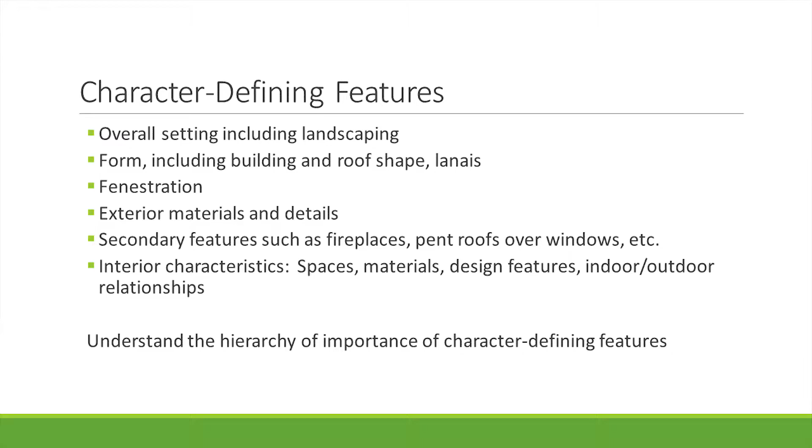Window patterns, door patterns, in other words the fenestration, exterior materials—and vinyl siding is not a character-defining feature, I just want to let you all know that right now. Then there are secondary features like chimneys, fireplaces, window overhangs, and protection that has been added sometimes over the life of the building. And then interior characteristics.

Now, one of the things with any historic home in particular, in understanding character-defining features, is that we advocate understanding the hierarchy of those features. There are some things that are more important, that are more distinctive about any home that you're in, and you should be aware of what those are.

Because the ones that are the highest priority and most important, you should not change. But there are other things that you might be able to fiddle with a little bit that will have less of an effect on the overall historic character of the building. And that takes a little bit of refinement, but you do need to think that way.

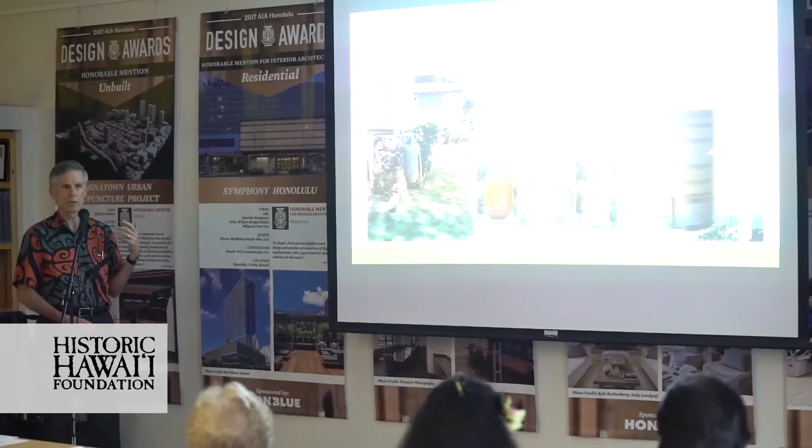So water conservation in particular is really about using less and capturing more. Lauren was really talking about a lot of that in her presentation. I'm going to get more into some of the specifics. So one of the things in terms of catchment is, just as was discussed before, capturing water as it comes off of the house. Now, there are all sorts of sizes and shapes of these catchment systems.

One thing to think about is that a small unit, like the one on the left side, doesn't hold that much water. And if you live in a relatively dry place, which makes catching water even more important, the amount of water you can store gets used up fairly quickly. So sometimes you might want to think about doing something a little bit bigger.

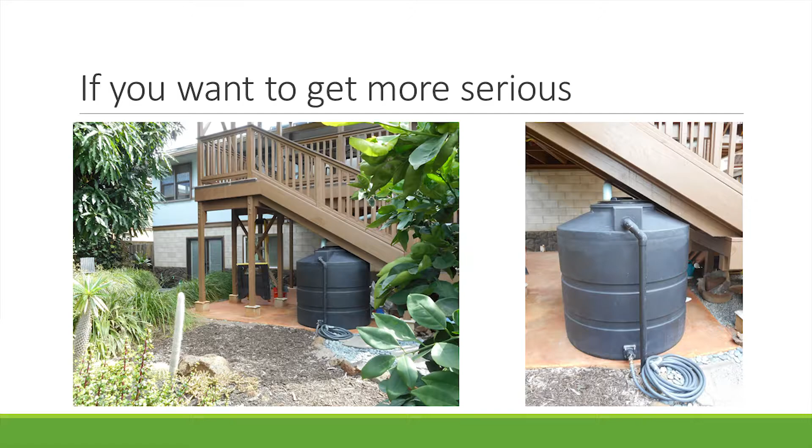This is a house near where Kaimuki and Kapahulu come together. It's not a particularly fancy house, but they actually started with a 50-gallon collection system. Because that place doesn't get that much rain, they found they used it up in no time flat. So when they redid this back area, they put in a 330-gallon containment system, which waters their entire backyard, a combination of stone and plantings in a very dry environment. So there are times when thinking larger does make sense.

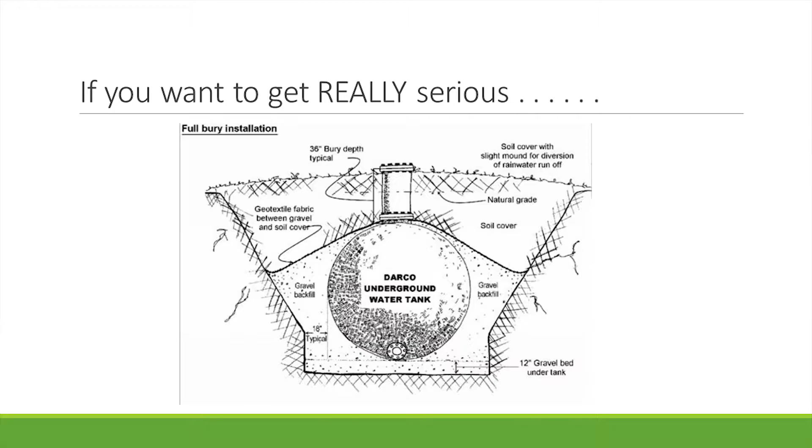You can go really large, but this requires a pump system and burying something in the ground, which will be very expensive. But it is an option, and if you live in a particularly dry environment you may want to do this, because even in dry areas that get 15 inches of rain a year, you might get 10 of those inches in 2 days. That's the way it works in Hawaii. So sometimes storing large amounts of water might make perfect sense.

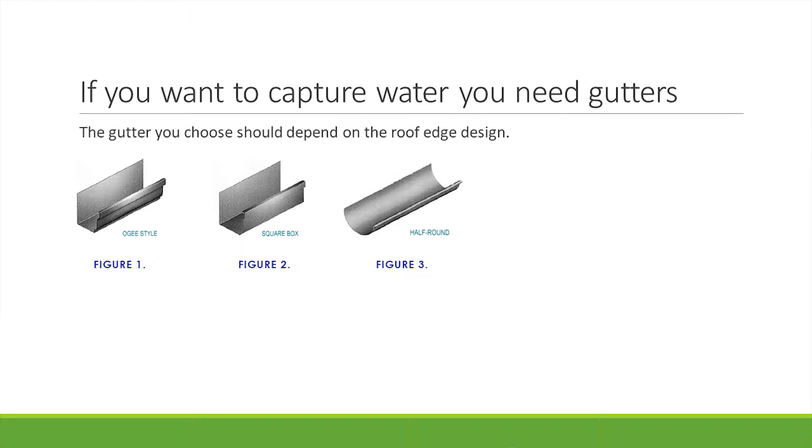Now, the other thing we're pretty conscious of is, obviously, if you want to capture water, you need gutters. The kind of gutter you use really should depend on the kind of house and roof edge that you have, and I'll talk about that a bit more. These are three basic...

shapes of gutters, though you can come up with any shape you want. The one on the left, figure 1, is a very standard gutter style. You've all seen them on probably hundreds of homes. These kinds of gutters can be roll-formed out of sheet stock copper, aluminum, or galvanized steel. They're relatively inexpensive, and they have very few seams because they can be rolled continuously. The problem is they don't always work on every roof edge, so be conscious of that as we look at some other examples.

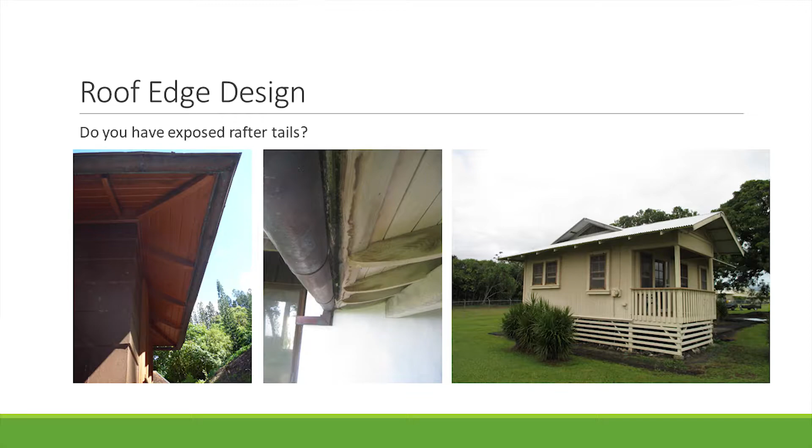So here are three roof edges. The one on the left is Nut Ridge, on Tantalus. The one in the middle is another house up on Tantalus, way up on Tantalus. And the last one is a little tiny, believe it or not historic, house called the Nurses' Quarters in Hilo.

None of these roof edges have fascias, and that's really important, because without a fascia—something that covers the ends of the rafter tails that you can mount a gutter to—it becomes much harder to use that OG style gutter, since you have no way to attach it other than nailing it to the rafter tail ends. In the first two instances, you don't even have those to nail to, so you have to use a half-round gutter on those kinds of installations. On the one on the right, you could actually use an OG or square-box gutter, but you'd be nailing them to the rafter tail ends, which is a good way to split them.

It also just doesn't look very good from the inside, and it takes away one of the character-defining features of a house like that, because you no longer can see the rafter tails. So the house in Hilo just drips the water onto the ground, which is probably the best thing of all.

For those, you can use a square-backed gutter shape and mount it very easily, and it will work. The good thing about it is that the fascia is wide enough that even as the gutter slopes, it's not that noticeable. So you can slope the gutter and it still blends into the background.

That particular gutter at the Kilauea Lighthouse site isn't actually a standard roll form gutter, it's a squarish gutter, but it still illustrates the principle. The house on the right is at Dillingham Ranch, and that's an example of a regular OG style gutter that is mounted against the fascia.

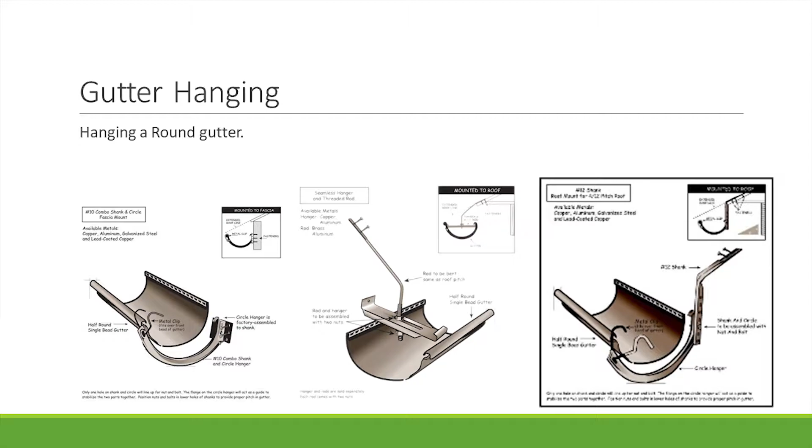So if you have exposed rafter tails, or you need to use a half-round gutter, there are various ways of hanging them. The one on the left has to be hung from a fascia, and actually the Iolani Barracks in the courtyard has that style of half-round gutter. But typically, half-round gutters are hung by a variety of methods, two of which are shown on the right, where you're basically hanging the entire gutter from the sheathing of the roof eave. There are ways to allow that to slope and get to the drainage, to the downspouts.

I kind of wanted to get into a little bit into materials. Everybody loves copper. I love copper, but I want everybody to understand that copper is also not invulnerable to damage.

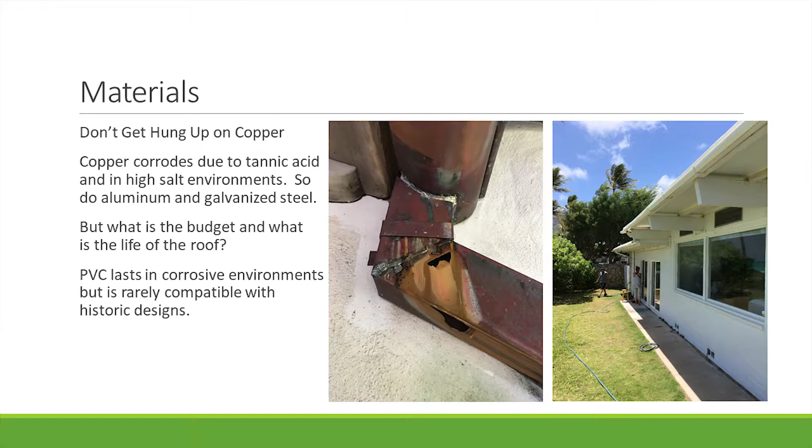This downspout is actually one on Tantalus that's been basically corroded. One of the reasons for this happens with copper in two instances. One is cedar roofs that get a lot of rainfall. Cedar actually gives off tannic acid, and it gets dissolved in the water and will react with the copper. And I've also seen copper really deteriorate with cedar siding or any other cedar that's near a shoreline, because the salts and the tannins of the cedar react and cause a lot of deterioration in copper.

So copper isn't necessarily the right material. I actually really like it, and we use it a lot. I actually like lead-coated copper, but that's really almost illegal these days. But I think you have to think about the budget and the lifespan of your roof when you're thinking about downspouts and the material for gutters and downspouts.

If you have a roof that's only a 30-year roof, why do you want to install a 50-year gutter? Because you're going to be ripping the whole thing off when you rip off the roofing anyway. So think about the life of your roof when you're thinking about the drainage system, because there's no reason to spend more money on the drainage system than you need to.

I have the picture of the PVC gutters here. I actually hate them, but they are viable. They get sold at Home Depot and whatnot. The good thing about them is that they aren't subject to corrosion, but I will say that there are relatively few houses that I think you would get away with having a PVC gutter on in terms of aesthetics. And if it's a historic house, I would say absolutely not.

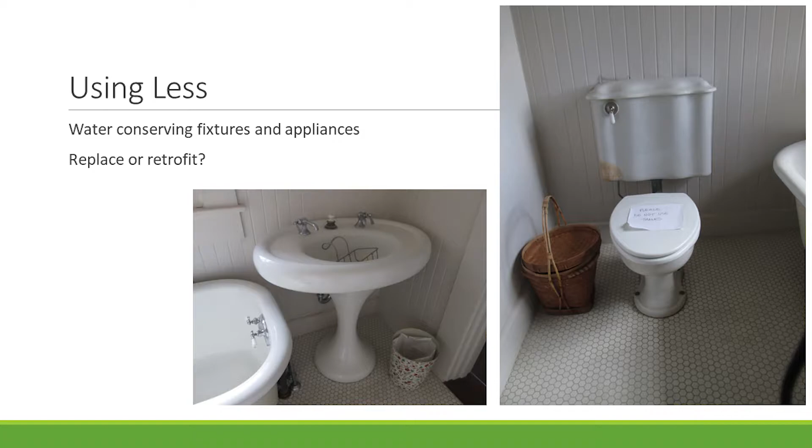And you will never duplicate it. So in some instances, I would say you got to keep it. And this is one of them. I mean, this is classic. It will never be replaced. You just don't use it very much or at all. And that one isn't getting used anymore.

But these are examples of some historic bathroom fixtures. And you have to look at them and see, for example, in the sink at the left, if you really want to conserve water, you can't stick a water conserving thing into that faucet. It just won't fit. One of the things is they sell these valves that you can get to retrofit faucets and whatnot, but in really old fixtures, you really can't do this.

And so one of the options, and again I use this with some caution, you have to be careful because we like to save things that are historic and very historically important. So we like to look for ways to save them. If you need to change a fixture to get something that is more water conserving, there are ways to do modern fixtures that have water conserving features to them that are period appropriate.

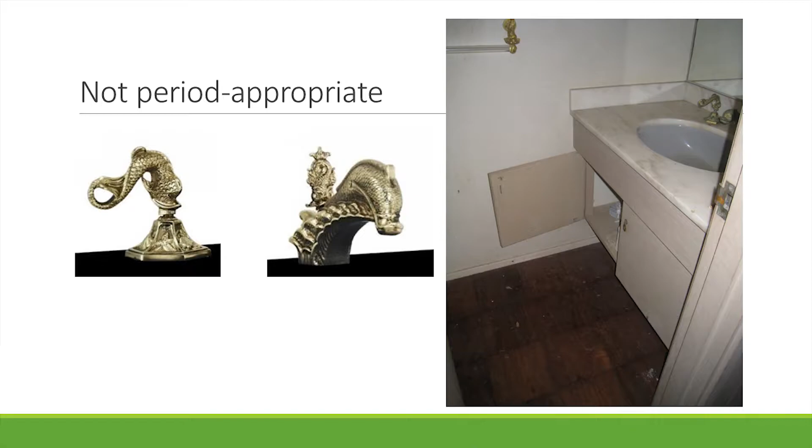That's really important, period appropriate. Now, this fixture is in a mid-century modern house designed by Ossipoff. And I can tell you, he did not pick those fixtures for this. It is not period appropriate.

I'm not even sure if it would have been period appropriate 400 years ago, but it's not period appropriate. So one of the things we've seen a number of times is people say, I've got an old house, I want to pick an old-looking fixture. Well, a lot of times what they end up doing is picking something that's about 100 years too early for the style of the house. I think it's really important to be sensitive to the character of the house. If it's a mid-century modern house, that is not the right fixture, and I don't care whether you like that fixture or not, it's the wrong fixture.

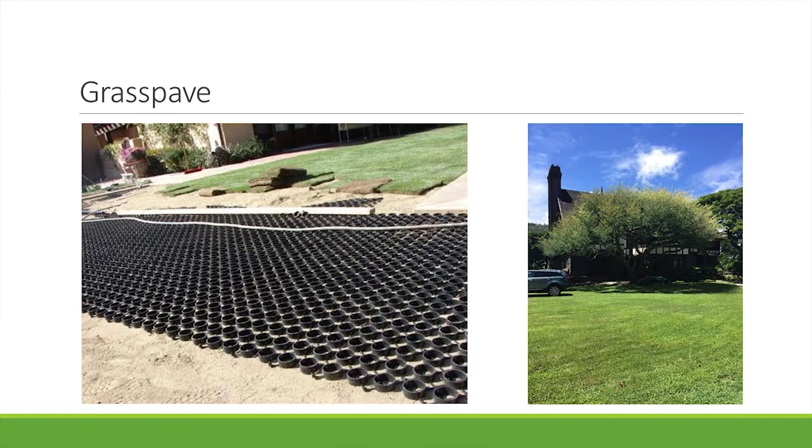I'm just using a couple of examples. The shot on the right is Mary's front yard, and they park on that front yard. Amazingly, it holds up remarkably well. I think lately she was telling me it's been chewed up a little bit by tires, but every time I've gone there, there have been people parking on that grass, and generally it looks really good.

If you're worried about it, you can come up with things like Grasspave. This is a little big to pass around, but this is an example of grass pave you guys can take a look at later. Essentially, it's a reinforced layer that the grass can grow up through, and it comes in different sizes and shapes. This isn't the same as that.

I wanted to talk a little bit about when this makes sense and when it doesn't, because this kind of thing has also been unsuccessfully used. If you don't keep the grass healthy—if you're living in Manoa, you get plenty of rain, the grass does pretty well. If you're in a drier environment, Bishop Museum tried to use this stuff, and it was a disaster because they didn't keep the grass growing, and before long you just saw all the plastic broken up by car tires. So you need to be aware of the environment, because there are some environments where this will work really well and others where it won't.

This is another example that I think can work very well. We used this in a small area near the Kaneohe Ranch headquarters, at the junction there where I know you guys know where that is. It works there because they get 130 inches of rain a year. The grass just grows right through this, and they hardly ever drive on it, so there's no problem. But again, if you're in a really dry environment, you're going to have to water the heck out of this and keep it trimmed in order to keep it looking good.

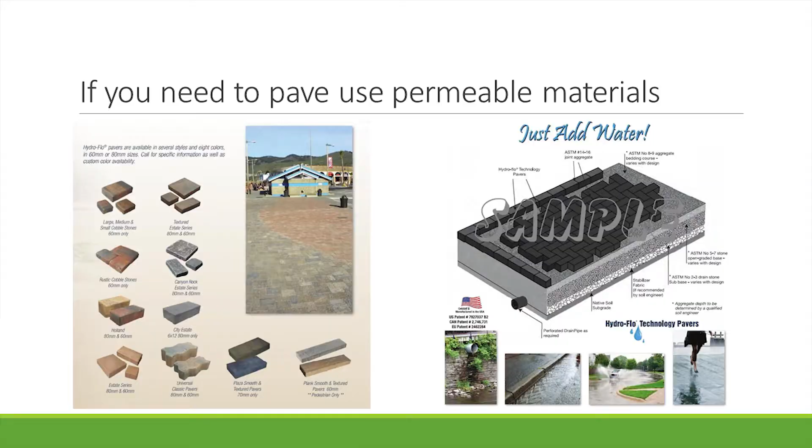In doing something like this, if you want to be driving on it, there's a lot of prep. You can see on the right-hand side, there's all sorts of base course and additional work that has to be done to make this truly stand up to driveway paving. But if you're using it for a lanai or some other paved area, you don't need to build it up with compacted gravel and everything else. So it may be a simpler solution for you.

There are all sorts of other manufacturers—this is just one particular one. I will say that doing this will be more expensive than just doing a regular concrete driveway, because you have to do a lot of prep to get this thing to work. But the strength of something like that is really designed to handle whatever loads you want to put on it. You can use it for a regular roadway.

You can also do something like gravel or stones or whatever you want, something that lets the water get into the ground. The concrete pavement that Lauren was talking about, that permeable pavement that you pour out, to my knowledge has only been used relatively few times in Hawaii.